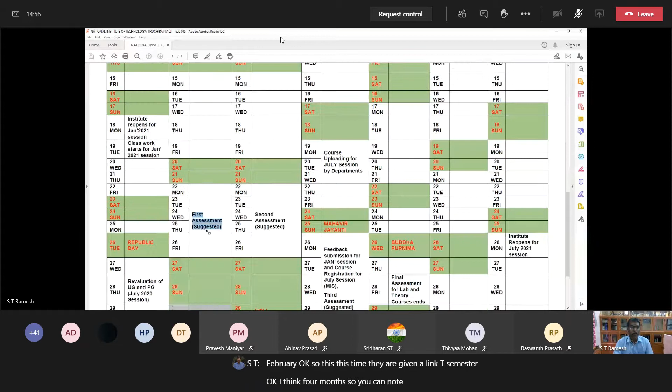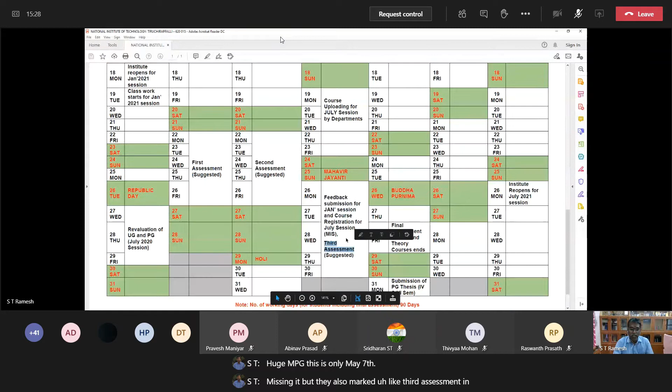So you can note down now: first assessment falls in the last week of February, and the second assessment suggested by the academic office is last week of March. They've also given April, because it's the last closure of all classes, UG and PG, on only May 7th. But they've also marked the 3rd assessment in the last week of April. So please remember: February first week, last week, March last week, and April last week. So the assessment schedule has already been given.

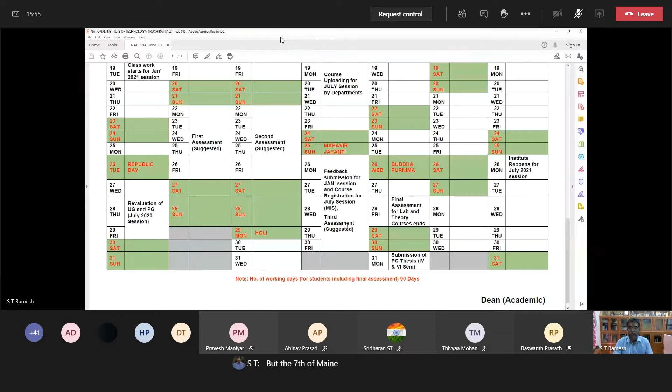So let me also follow up with the class committee chairpersons, we will also fix the class examination point of view assessments. So closure, you just note down now, the 7th of May, and the end assessment or final assessment starts from 10th May. So these are the academic schedule.

It has already been circulated, it is also there on the website. I'll request the CRs, whatever I have circulated in the group, you can also share it to the individual classmates' group as well. That is number one. And number two is the list of holidays is also already given on the site, that also you can follow, because anyway the faculty members will follow it while preparing the course plan. That also you can have a look.

Okay, these are the general introductions, general introduction about this, and introduction about myself. I'm Dr. Ramesh, graduated from IIT Madras and joined institutions in 2006. I've completed almost 12 years of service in NIT Tiruchirappalli, and I have taken up associate dean academic role twice, so I'm well versed with the academic system, and I was part of all the academic initiatives in NIT Tiruchirappalli as either a member or coordinator.

That is my background. My specialization includes water and wastewater treatment and waste management. So those who are really interested in water and wastewater, let me know.

I'm right now the coordinator of Environmental Engineering program. I've taken up very challenging responsibilities given by the Ministry of Education last year. NIT Trichy was the coordinating agency to conduct JoSAA as well as CSAB, with NIT Tiruchirappalli as national coordinator, so all the allotments I have done, along with IIT Roorkee. The Director was chairperson and I was national coordinator, coordinating with IIT Roorkee; this time MNNIT Allahabad and IIT Delhi are coordinating. That's one challenging job we completed successfully without any difficulty or court cases.

The course title is CEPC 17, Environmental Engineering 1. Initially, last year it was in the 3rd semester, but because you require some basic fundamental knowledge for this subject, like fluid mechanics fundamentals, it has been shifted from 3rd semester to 4th semester. From this semester onwards, this is a 4th semester course. Environmental Engineering 1 is here, and Environmental Engineering 2 is in the 5th semester. CEPC 17 Environmental Engineering 1 is a core course, what we call program core.

The prerequisite is some basic knowledge in water and its treatment, whatever you had at school level or in first year chemistry, at least some background knowledge about water and its treatment. Since it's a 3 credit course, it's also given importance to go for 45 hours. If you go for 4 months you can comfortably make it to 40, so let me try to finish it off in 40 hours.

The assessment pattern includes continuous assessment and end assessment. Continuous assessment, apart from end assessment, will be finished before the closure of the class schedule, and includes either quiz, MCQs, assignments, or activities like teamwork, or group projects, and solving complex problems, which we'll discuss later based on your involvement.

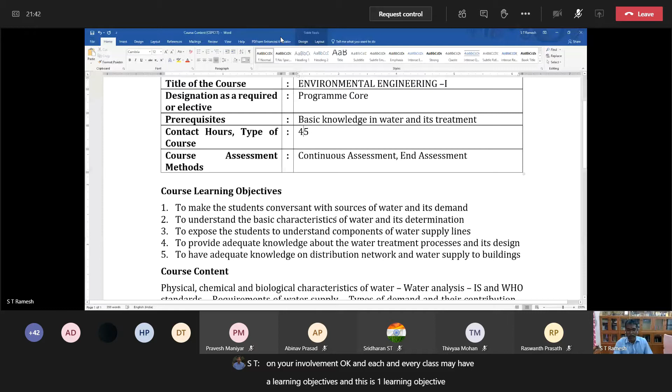Each class may have learning objectives, and here is one. First, you should be familiar with the sources of water and also its demand. The second important learning objective is to study and understand the basic characteristics of water and also its determination.

In water systems, you have only surface water sources and groundwater sources, and the quality of groundwater is not similar to surface water quality characteristics—that is unique. Surface water characteristics may be rich in solids, either in suspended form, colloidal form, or floating materials, because the source of surface water is mainly surface runoff, which carries large amounts of sediments to nearby water courses.

What I mean to say is surface water includes water from a reservoir, a lake, a river system, or a pond. If you happen to use groundwater, the quality characteristics are entirely different, because then you have to be much more cautious with dissolved organic and dissolved inorganic matters. Those familiar near the seashore would have come across problems with salts, sodium chloride and other related compounds.

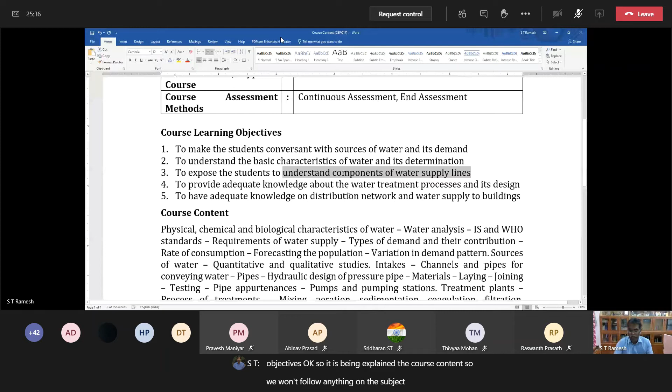So these are the learning objectives, as explained in the course content. We won't follow the subject strictly unit-wise, content-wise, or paragraph-wise—it's more like a course outline, so the faculty has the liberty to elaborate on the course content.

The first lecture will discuss the physical, chemical, and biological characteristics of water—that's the important part. Physical: by seeing, touching, smelling, or tasting, you can assess the quality of water in a physical sense.

Chemical: you take it to the laboratory and do targeted contaminant analysis—you can estimate calcium, magnesium, potassium, sodium, carbonates, bicarbonates, and find out the chemical characteristics of water. Biological characteristics: if there's contamination with bacteria, protozoa, or virus, you could say the water is completely not potable or not usable for domestic purposes. So we'll discuss in detail the physical, chemical, and biological characteristics of water.

We'll cover water analysis theory, and you'll continue in the laboratory to test things like pH, TDS, solids, chlorides, and other essential quality parameters, explaining the basic fundamental concepts—if a parameter is high or low, and what the real importance or problems are.

In India, we follow standards—each water quality parameter may have a set standard. If it's beyond that level, you either have to treat it before use, or you can't use it for any purpose. We follow Indian Standard IS 10500; I'm not discussing it in detail right now, but note that IS 10500 clearly specifies water quality requirements for domestic purposes. The revision was in 2012—IS 10500:2012.

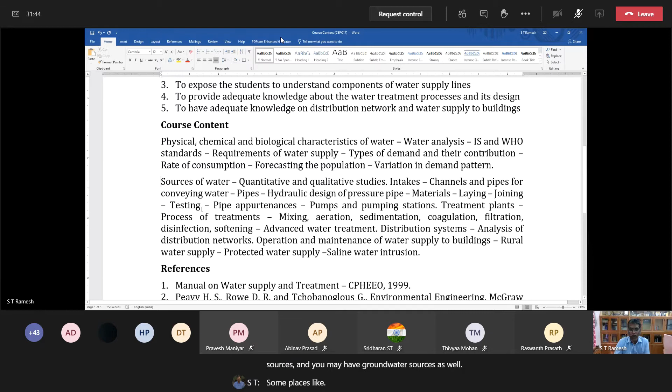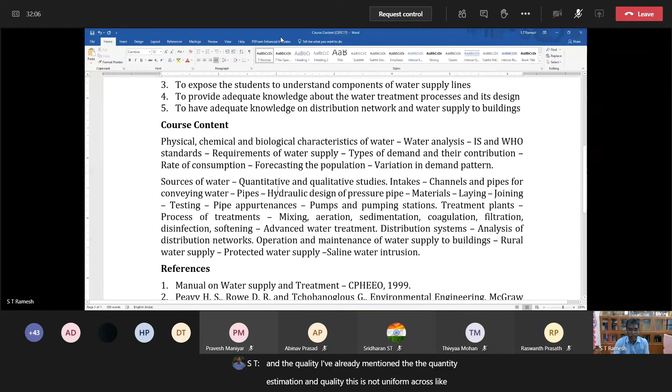Some places predominantly depend on groundwater sources - some parts of India predominantly follow groundwater sources. And as I've mentioned, the quantity estimation and quality are not uniform across surface water sources and groundwater sources. We'll discuss in detail qualitative and quantitative studies.

We'll also discuss intakes in detail - from the sources, you have to tap the water, for example how to tap water from a river using intake wells. Those familiar with Trichy would have seen so many intake wells inside the river Kaveri to tap water for consumption. Near river Ganga, you cannot have intake structures inside the river because the water flow is very heavy, so they have intake structures on the bunds or away from the river, called either intake wells or infiltration galleries.

River Ganga you would have seen or noticed in this. For fetching water, you need some intake structures or intake towers. From the intakes you could also carry the water to the point of use or to the treatment plant, but that cannot be done in a simple way.

So that we'll be discussing in detail with different types of channels and pipes for carrying water. Please understand clearly, we are now discussing from an intake point to a point of use, or intake point to a treatment plant. You would have seen big conduits from a reservoir to, say, a treatment plant or to a city.

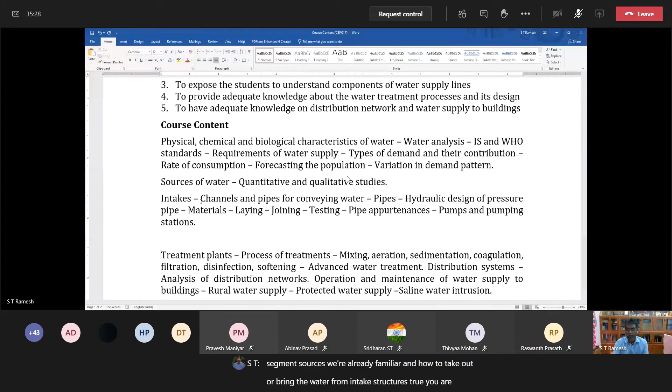Being familiar with the third segment, sources, we are already familiar, and how to bring the water from intake structures to your treatment plant, that also we'll be familiar with. And that's what I told you. Now...

Water quality may not be good enough or suitable for potable purposes because of man-made activities and natural activities - this water is already being contaminated. Contaminated water you cannot supply to the consumers, you have to plan for some treatment system. That's the last option, and this we'll discuss in detail at the UG level.

What are the process fundamentals? Each and every process may have some process fundamentals. Surface water may have large amounts of solids, maybe sediments. How to remove the sediments from water?

That is very easy - just take out the water. Imagine you have a situation where you fetch water from a pond, already turbid water. What people normally used to do is take the water and ideally keep it for a long period of time. The solids, which have more specific gravity than water, automatically settle down at the bottom. We call this simple process sedimentation - allowing the particle to settle by simple action of gravity. Micro sediments or colloids may not be able to settle very fast.

What they do is add coagulants. You would have seen this - you add aluminium sulfate, alum, into the water, and it may split into aluminium 3+ and other ions. Al3+ may have a lot of positive charges, and the colloidal solids in the water may be negatively charged. So charge neutralization happens, and all your colloidal materials may be completely destabilized, so I could manage them in the sedimentation basin or sedimentation tank.

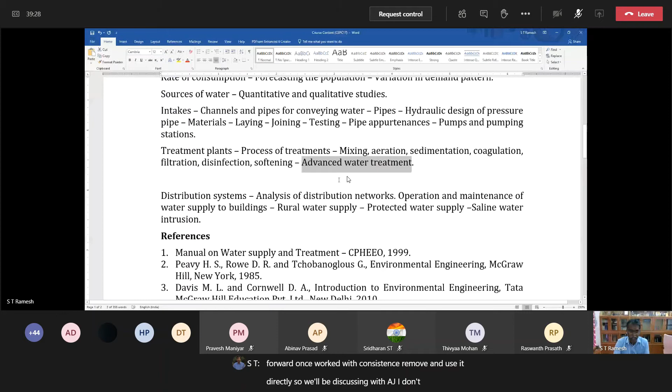After treatment, the water will be stored in a storage well, and from there you have to distribute it to the consumers, so you need to plan some sort of distribution network. A very big challenge is how to ensure that, at the end of the day, every consumer is able to get water with the required quantity as well as required pressure. For that you have to plan distribution network analysis, how to optimize the diameter, and how to optimize pressure distribution in the pipelines. We'll discuss this in detail with distribution networks.

The last part is about once water is supplied to the building level, how to maintain water supply systems in the buildings. Probably you may get your water from a corporation or other local body, store it in a sump, and from there, from your underground tanks, you may pump it to elevated tanks where you can have distribution. We will discuss this in detail with operation and maintenance of water supply to buildings.

The last one is about rural water supply systems. Whatever we discussed so far is good for urban systems, where you can plan a treatment plant and treat water with the required quality before supplying it to consumers. But this may not be possible in rural water supply systems. Rural areas normally follow only wells, say example bore wells or open wells. Is there any technology to treat the water by themselves? We'll discuss this in detail with the rural water supply system, and how to supply protected water to consumers in rural cases.

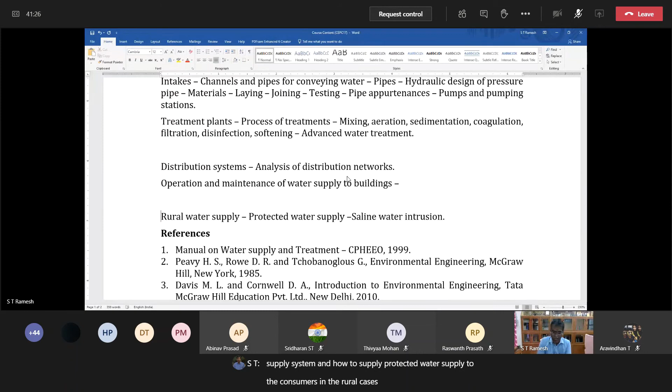And the last part: because of consumption of water, those familiar with coastal issue areas would have also experienced saline water intrusion. We'll discuss in detail what saline water intrusion is, its different causes, and how to remove the salt water, or push it back towards the sea. So these details we'll discuss with saline water intrusion.

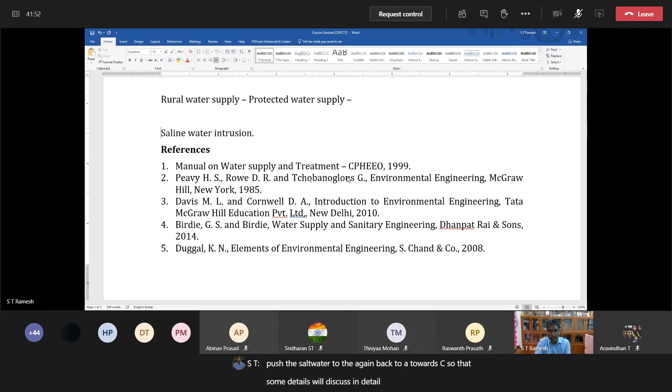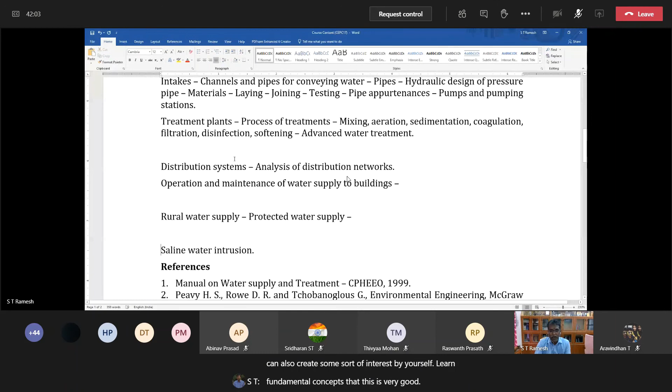So this covers the entire subject. It's very interesting, and you can also create some sort of interest by yourself, learning fundamental concepts. That is very good for your higher studies point of view or career point of view.

These two books are very good. One is Peavy and Rowe. This book is very nice, with very fundamental concepts. The second book is Davis and Cornwell, Introduction to Environmental Engineering, also a very nice book. Most of the contents or basic fundamentals you can take from these two books. Probably I'll drop these two books in the Dropbox.

You can download and have a copy and look into these two books, which are very standard. But if you have some difficulty in reading these books, you can also refer to these two Indian books. The concepts may be the same, but they are at a very elementary level of understanding.

If you have anything related to this topic, you can also refer to these two books. These are Indian editions, either in soft copy or you can buy a physical copy. So I prefer these two books. Anyway, I'll drop it in the Dropbox. And the Indian system will follow the manuals.

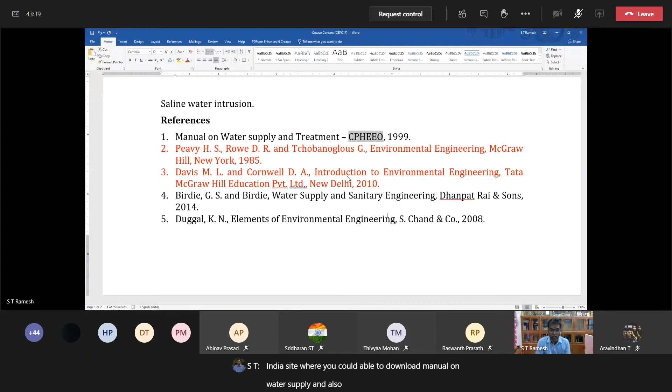CPHEO stands for Central Public Health Environmental Engineering Organization. Please make a note of this. You visit the CPHEO site, just type it in Google and it will go directly to the CPHEO Government of India site, where you could download the manual on water supply and treatment. Let me also check if there are any recent editions, or let me follow up with my friends. I'll get a copy and post it in the Dropbox.

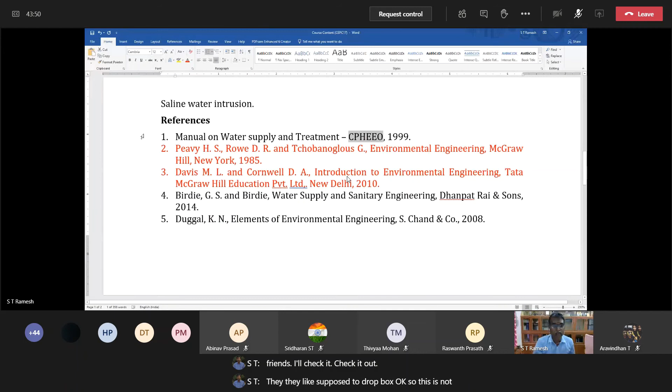This is not for your examination point of view, but at least have a look at what is being recommended or mentioned in the manual. So these three books are important that you need not worry about. Let me drop them in the Dropbox.

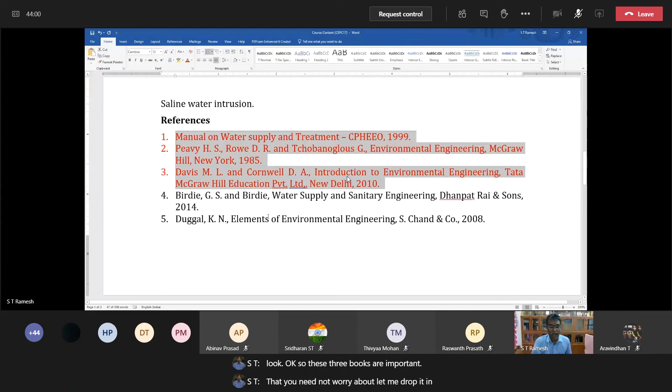This is what we are going to cover for the entire semester. I hope I have given some input, and I'll also take up one more so you can understand the process of my class. If you have any difficulty, you can post it in advance, and we'll mutually understand together and have a smooth walk through the entire semester. Is it okay? Is it fine?

Thivyaa and Raswanth, you can interact with me. Is it fine? Others also, but I'm not familiar with the names. Let me see, based on my interaction, let me also call other persons as well. Is it okay, Thivyaa?

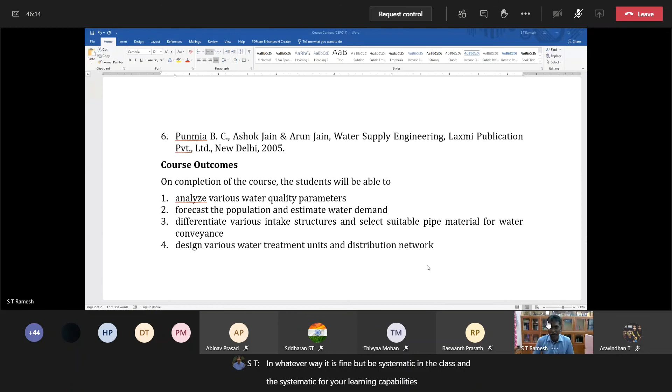I prefer at least loose papers or a note where you can highlight the important points. If I say something is important, you just note it down. Anyway, the class notes will be uploaded, so you need not worry about that. Either you can read it in soft form or take a printout and highlight the important points while learning. Whatever way works, but be systematic in class and systematic in your learning. These two things I'll expect from your side. Is it okay?